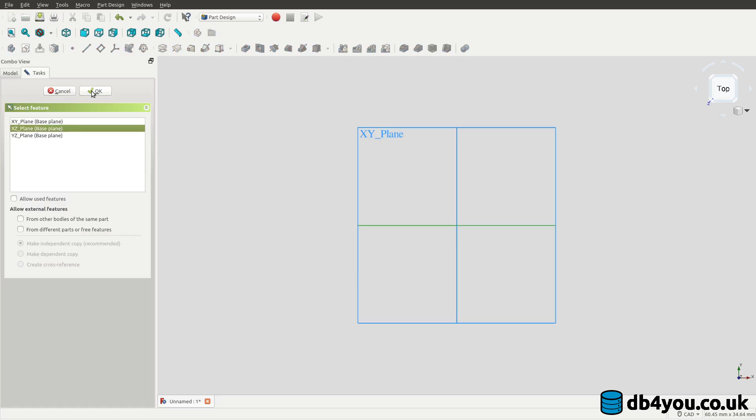So after learning several new things about FreeCAD, I am going to redesign the same DIN rail holder part that I redesigned in my previous video from the original design. So this is like a third iteration, but this time I can use a much neater way that one of the members from the community was kind enough to showcase.

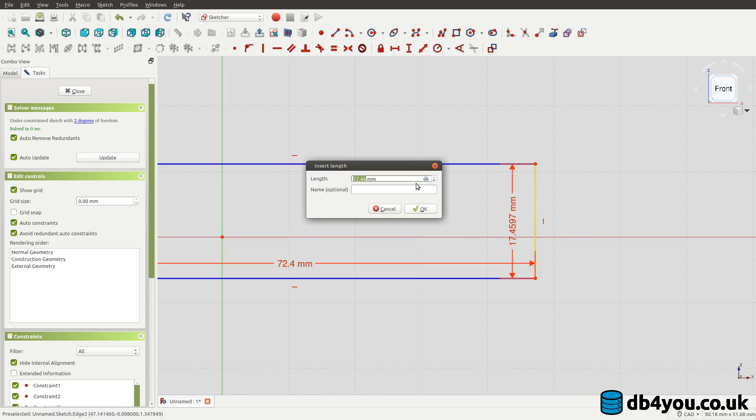And as usual, this just blew my mind as someone who's, again, fairly new to all of this. That the part I've made, you can make it so much quicker and so much easier just by changing your plane, which you use to design your part. So obviously I was not aware of this because noob.

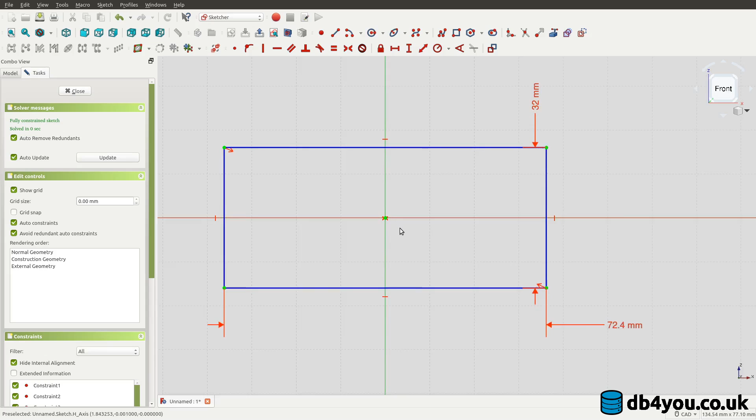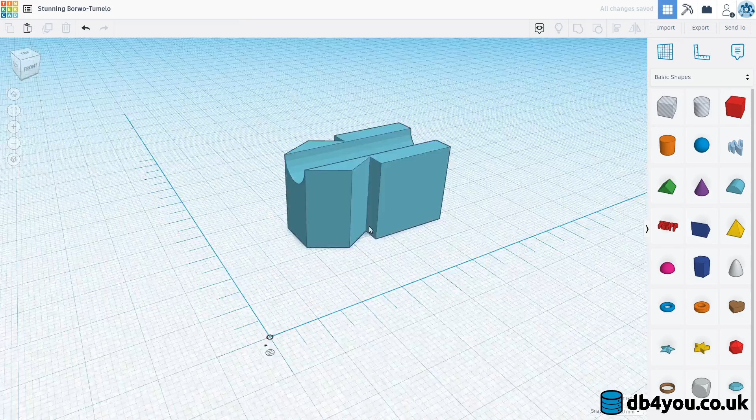Yeah, there is that. The Tinkercad mentality is still something that's lingering in the back of my head, and that's fine. I'm still learning. Just to give you a quick reiteration, in Tinkercad what you usually do is you cobble up objects together, and you move them down and you get your cutout, align everything, blah blah blah, and you get your desired parts. So that's how I've learned how to use this tool. So you add things together and cut them out.

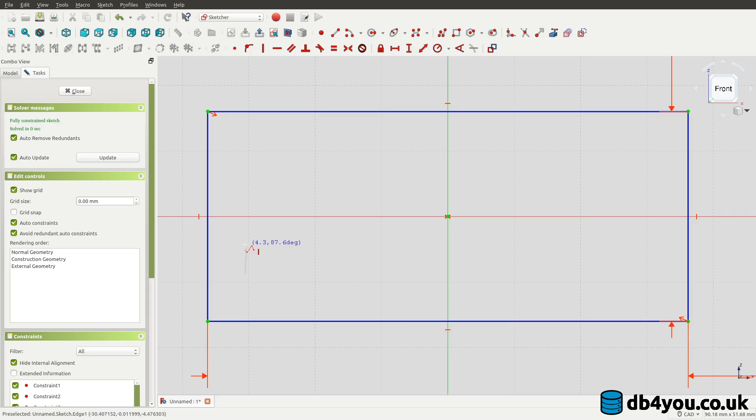Well, as I'm learning the fun way, this is not the same experience, but this is better, at least for me. So now what it all takes is to create a general outline of the shape that I want the part to have. So it's really not important how it looks initially. It's just irrelevant.

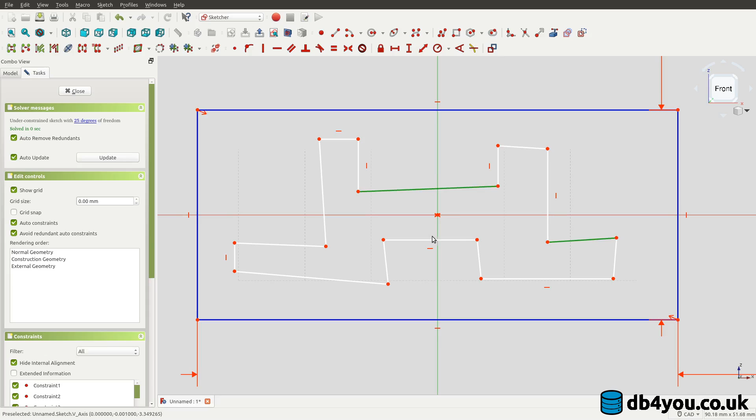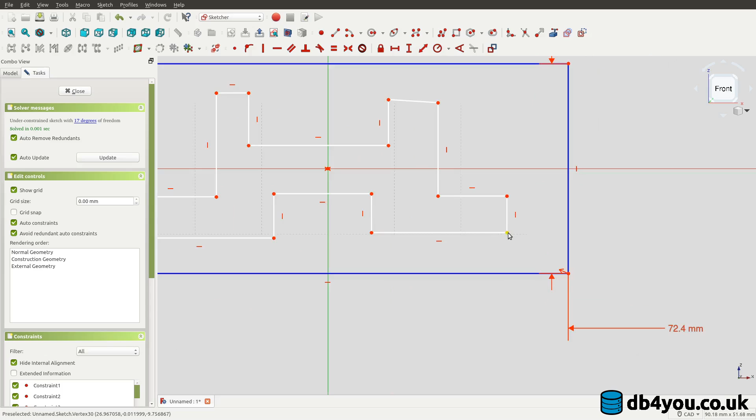I'm going to fix all of the horizontal lines first, using this beautiful tool, and now all the vertical ones. Hopefully I did not mix up the naming too much. Okay, so that's fixed for now. What I need to do is get this point and this point together, because whenever I change the length of the outline, I want the entire part to change as well. So there is this, same with the height.

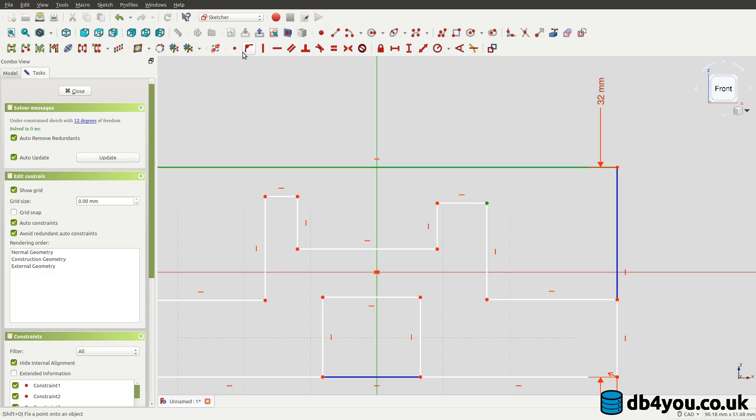Oh, I missed one. Golly gee. What a bad designer. Now this I need to link with the top using this beautiful tool, and the same goes for the other side. Now I can slowly start to give it some dimensions. So this wall is 6 millimeters, and to make it nice and jolly, I am gonna make sure that both of them copy each other.

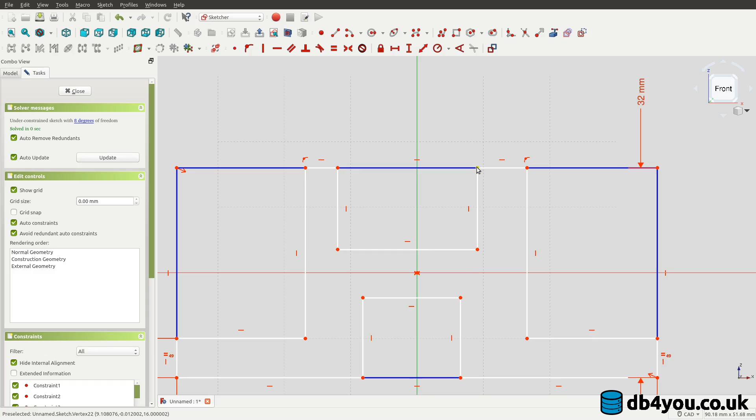That is great. Now I also need to give some distance to this, but first I will need to make sure that they move together. Yes, very good. This is now just so super easy. And while I'm at it, the same needs to happen to the bottom part of my lovely design. Okay, now let's go for 16 millimeters, and let's make sure that the other side mimics perfectly what the other side does.

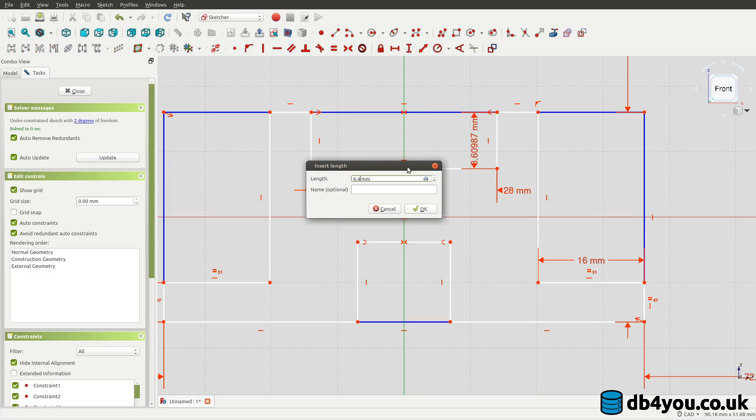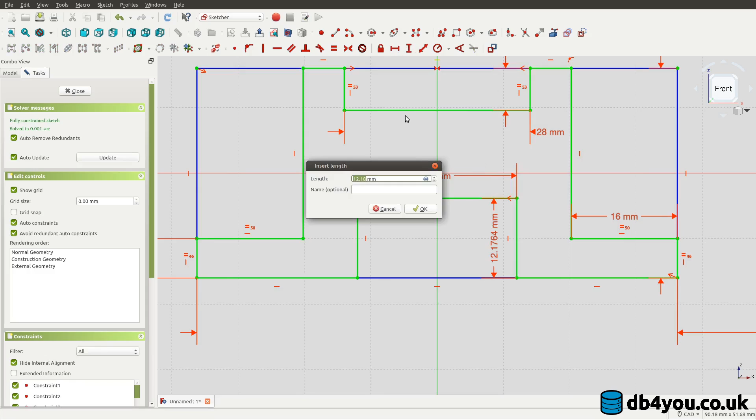This should be 28 millimeters, so that's what I'm going for. Tremendous. And the height, I guess this is 6.4 millimeters. Wonderful, wunderbar. And make sure it gets copied as well, as in mimicked. I'm sure there's a better term for it. The bottom part, the width 24 millimeters for now, and this will be 9.6, and as you can tell, the sketch is fully constrained, exactly what I wanted.

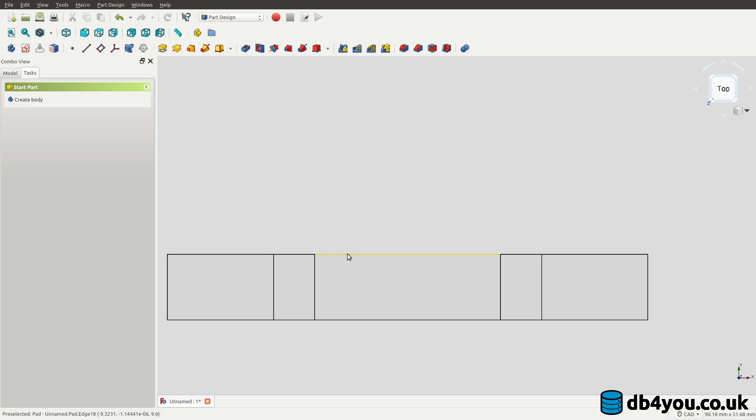So to make the first part, it takes only this amount of time, I don't know, 4 minutes, 5 minutes. The things you learn, and when I started this, golly gee, just so ignorant. The things you learn, eh? Let's make it not 320, 32 millimeters.

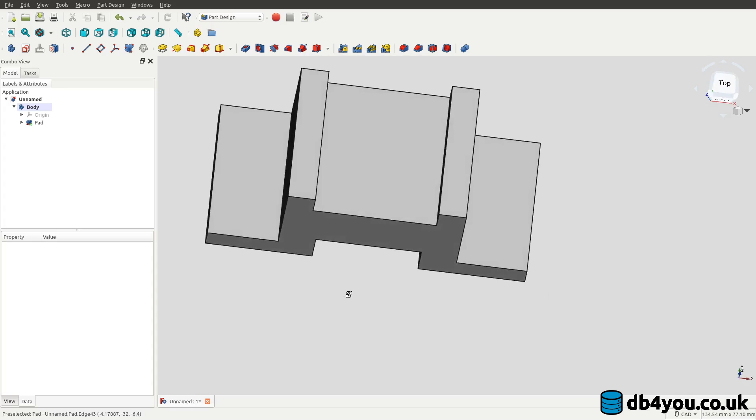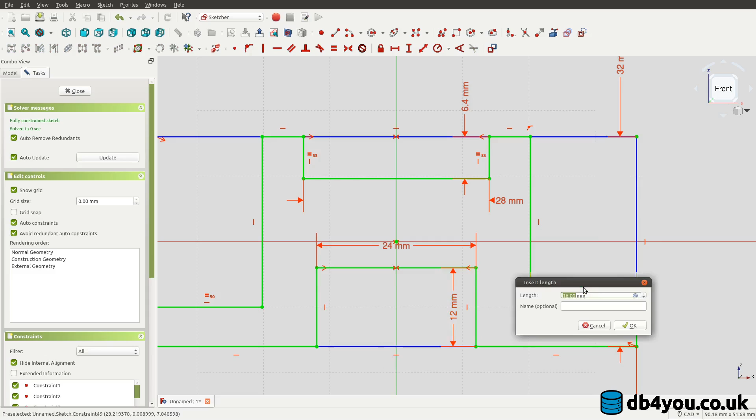So now, as anyone with two functional eyeballs can tell, I got my parts up and running. Now, if I want, I can add my beautiful holes here and here, and adjust things, and if I ever need to make it a bit smaller and wider, let's say this needs to be 12 millimeters and this needs to be 18. Now everything actually adjusts on the fly, and it makes so much more sense.

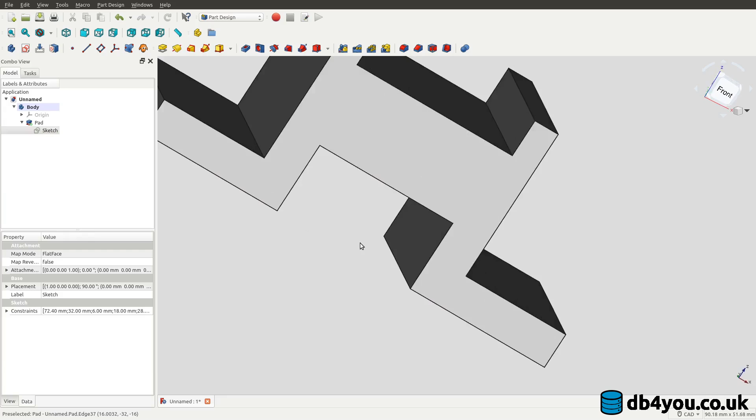And it's thanks to you, FreeCAD community, that I learn these things. I try to design some parts on my own, but it's super helpful when people help you out. So now the part has adjusted how it looks, and it's just amazing. This is a really basic design after all. And I think I'm gonna stop here.

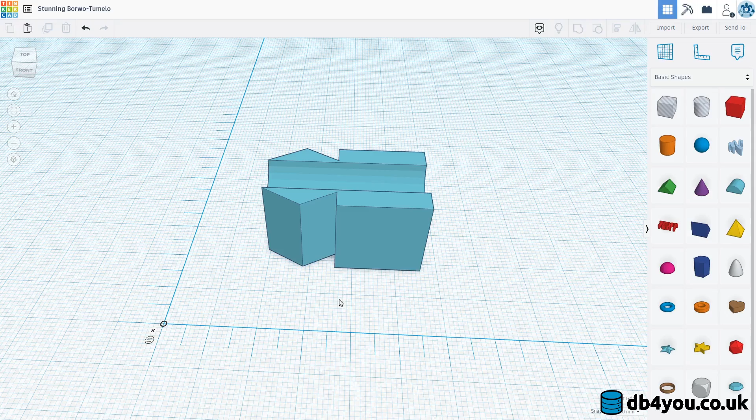This is really cool, and I need to take up more of the FreeCAD challenges that I've seen on YouTube. I'll leave a link to the first part and how long it took me to design, because I used the infamous Tinkercad mentality, which I'm gonna get out of my brain soon enough, methinks, so I can know which plane to use for which part. But that's a different battle, and hopefully in the future I'll get better with all of this.